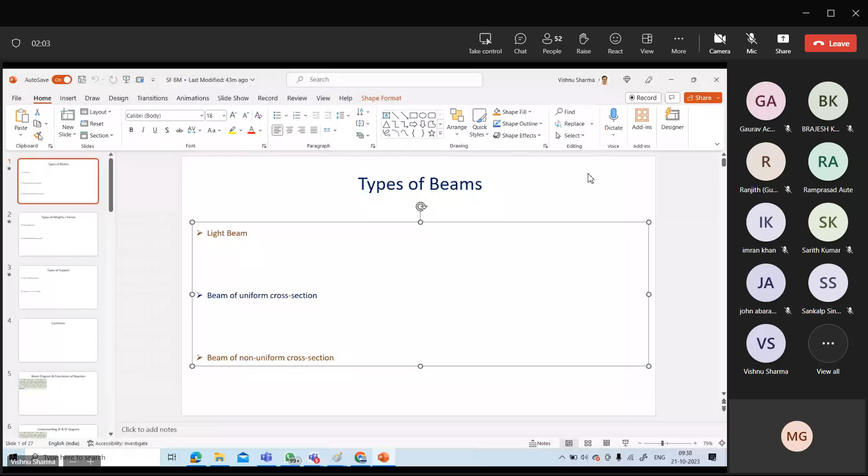Yes sir. Okay guys, the slide is visible right, with types of beam written on it, right? Correct, can you confirm?

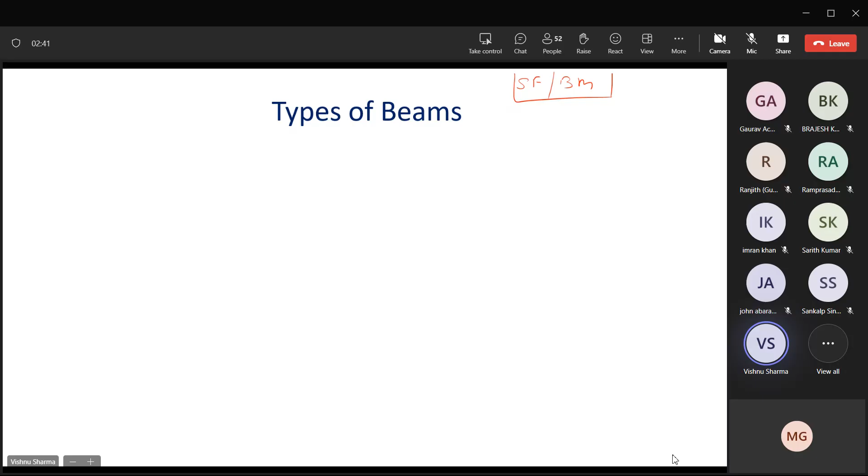Okay, so guys we are now going to introduce the SFBM topic. Before we go to SF or BM as such, we need to be clear about certain terms which we are going to use.

In our questions we may use the word light beam. Light beam means a beam whose own weight is insignificant as far as the question is concerned. That means you will not take into account the weight of the beam. Light beam would mean that whatever other forces are given, you will consider the weight of the beam to be neglected - it will not be given. So you should not start asking what will happen with the weight of the beam, because if the word light beam is used, that means the beam has negligible weight.

When we draw our diagrams, if we draw the beam with a single line, then we should see that as a light beam so that in the diagram we don't have confusion. When I represent a beam with a single line, that shall be construed to be a light beam. Is that clear?

The second type of beam in our question will be a beam of uniform cross section. There will be only two types of beams in our context - there can be multiple variable beams and all those things, but a beam of uniform cross section means the weight of the beam will be significant and has to be included. But what does uniform cross section mean? It means the weight of the beam is uniformly distributed along its length.

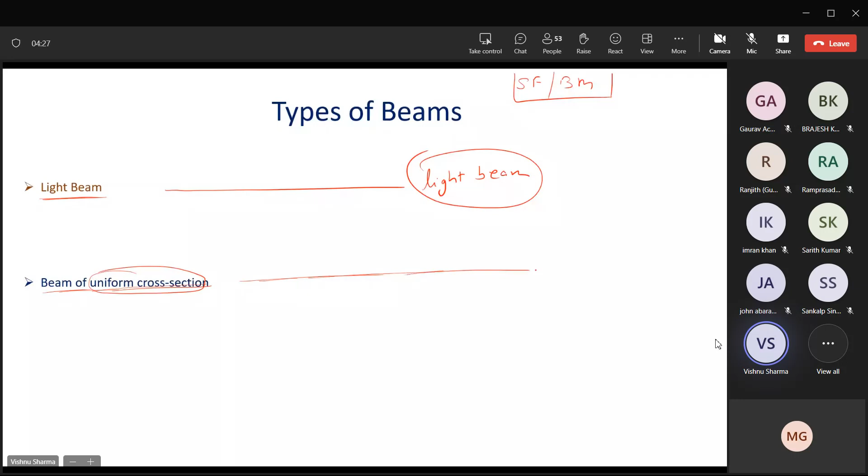And if it's a beam of uniform cross section, we will represent it like this - beam of uniform cross section. Are these two types of beams clear? That means if you say this beam is 10 meters long and it weighs 50 newtons, it means the weight of the beam is 5 newtons per meter - if you take 1 meter of the beam, the weight will be 5 newton. That is what is meant by uniform cross section.

Then there can be beams of non-uniform cross sections - we will not be interested in studying them. The beam may be like this, or you can draw whatever fancy idea you can get. You can make a beam of whatever type that appeals to you, but this is going to be out of our discussion.

So are the two types of beam that we are going to use - light beam and beam of uniform cross section - clear, and how they'll be represented in the diagram? Class clear? Yes sir. Okay, so don't have any confusion about the weight of light beam - it's already accepted that for a light beam, the weight of the beam is negligible.

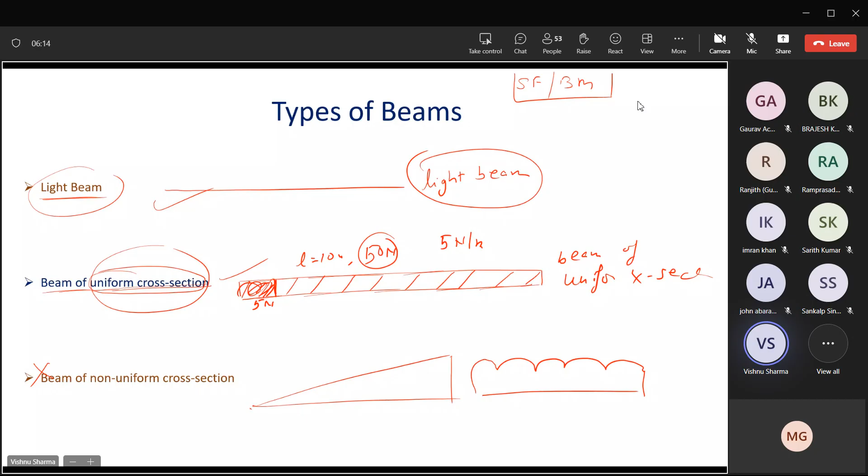Then some weights or forces will be loaded on the beam, whether it is a light beam or a beam of uniform cross section. Now, the types of weights we'll be dealing with include a point weight or a point force, meaning this weight acts at a singular point.

Of course, nothing can literally act at a single point. There cannot be a weight acting at a single point, but for the purpose of our calculations, a point weight or point force shall be deemed to be one which is theoretically acting at a singular point.

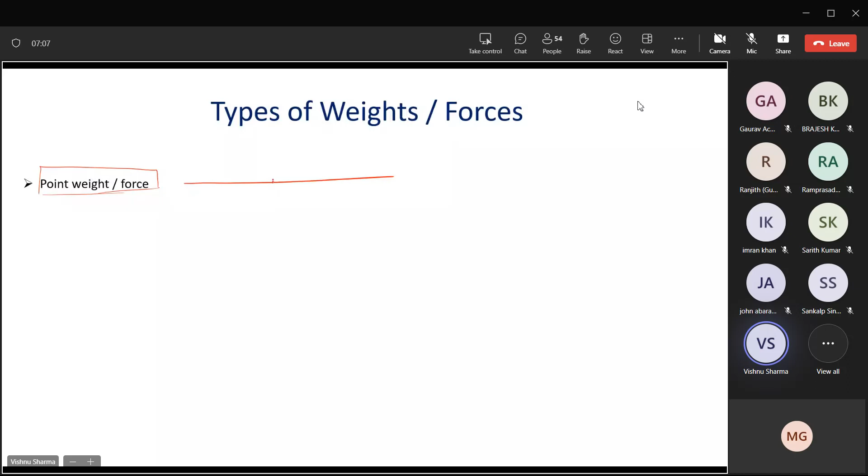So if I have a light beam and at point C I have a point weight, I will represent it like this and put the value. If the point weight is 20 newtons, I'll represent it like this. If the same 20 newtons was acting on a beam of uniform cross section at point C, I'll draw the beam like this, identify wherever point C is, and put the point force of 20 newtons. This is how I will represent point forces.

Is the concept of point force clear, guys? Yes sir. Okay, then we have uniformly distributed load.

In short, in exams this terminology is used sometimes - UDL. UDL stands for uniformly distributed load. It means the load is distributed at the same uniform rate along the entire spread, whatever the length may be.

For example, let's say I have this light beam and this beam of uniform cross section - two beams with me here. Let's say here is A and B. Let us say there is a UDL of 30 newtons.

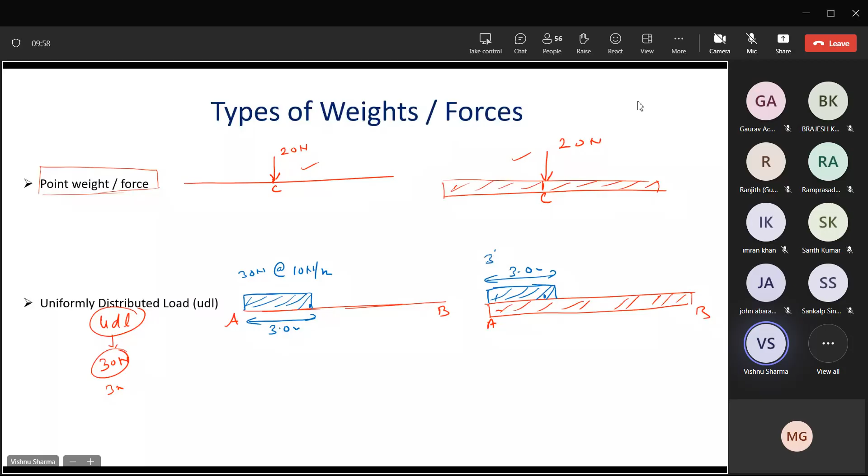So the same thing, if I have to represent it on the beam with uniform cross section, it will be exactly the same. I'll represent this UDL here over a length of 3 meters. So this is 3 meters, and it is 30 newtons at the rate of 10 newtons per meter.

Any questions on these two weights - point weight or point force, and UDL or uniformly distributed load? Guys, any questions on these two types of weights or forces? Let me know.

Sir, you mentioned UDL is distributed only for 3 meters. So this is the question I gave you - we have a UDL of 30 newtons spread over 3 meters from end A. So this is what I have specified in my question now.

Okay beta. But if we didn't have 3 meters distributed all over, then how will it be? Then you'll draw over the full length. If he says full length, you'll draw the full thing over the full length, beta - you'll stretch this. Oh, here, okay.

Any more questions, guys, on how to represent weights and forces in the diagram?

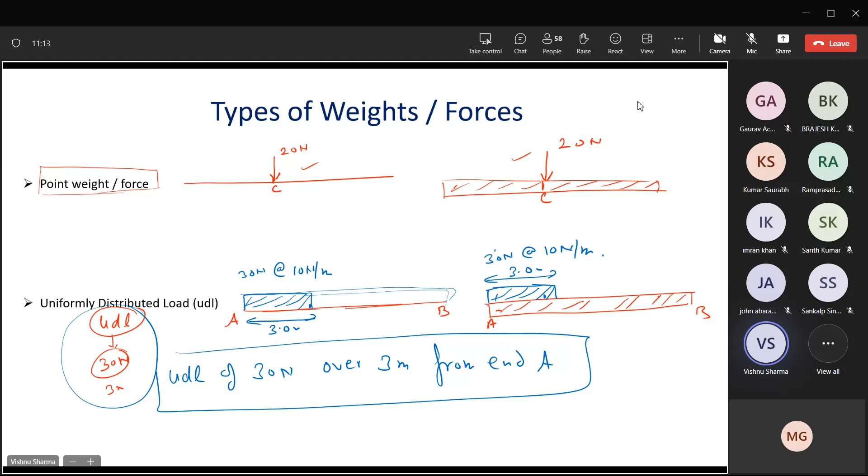Next is the type of support the beam will have, because if you don't support the beam, by gravity it should continue to move towards the center of the earth. If you place your pen on your table, with the pen representing the beam, the pen has come to rest on the table because the table has supported it. Your table top would have continued going towards the center of the earth if the four legs of the table were not supporting it.

Whereas the tabletop is not fully supported on the floor - it is supported by maybe three or four legs - the pen, when you keep it on your table, is supported along the entire length. So how is the beam supported?

Again, there can be point supports. They are also called knife edge supports because a knife edge is like a point. So if you have a light beam or a beam of uniform cross section, where the supports are will change from situation to situation. Let us say we have 2 point supports, one at end A and another 2 meters from end B.

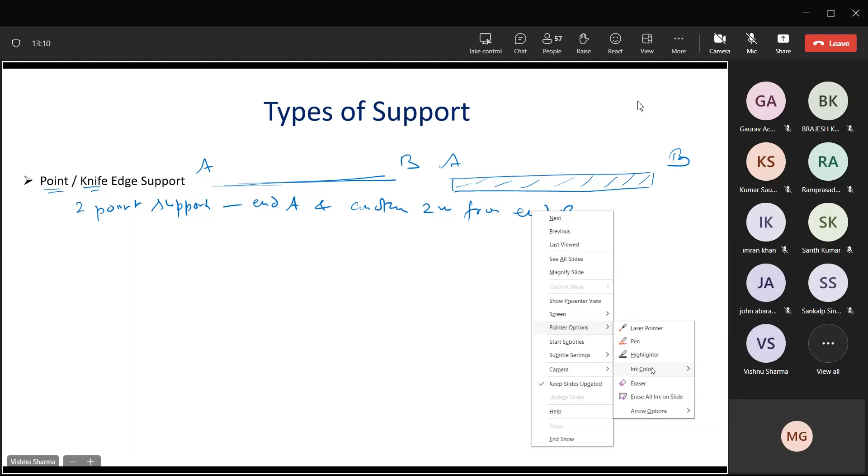What does it mean? It means a point support will be like a point weight, but the only difference is it will be acting from downwards. It will be supporting from down. So basically, you see.

One support is at end A. I will put the support like this, a knife edge support. Another support is 2 meters from end B, so I'll put it somewhere here. The same thing, if I have to put on the uniform beam of uniform cross section, I will put one at end A and another 2 meters inside of end B.

This is how the point or knife supports will be represented in our diagrams. What does it mean? Practically, or theoretically rather, these supports are acting at a singular point, like the point force from top, they will exert a point reaction from bottom upwards.

Then we can have support over a certain length or the entire length. I gave you the example of your pen. If you put your pen on your table, the entire pen is supported by the table, that means it's supported over the entire length.

Or sometimes you take a plank to cover a gap, suppose there is a trench you want to pass over, and you put a plank on the trench. Some part of the plank overlaps the ground on one side, other part overlaps on the other side, and the middle part is not supported. So support can be at a point, over a certain length, or over the total length.

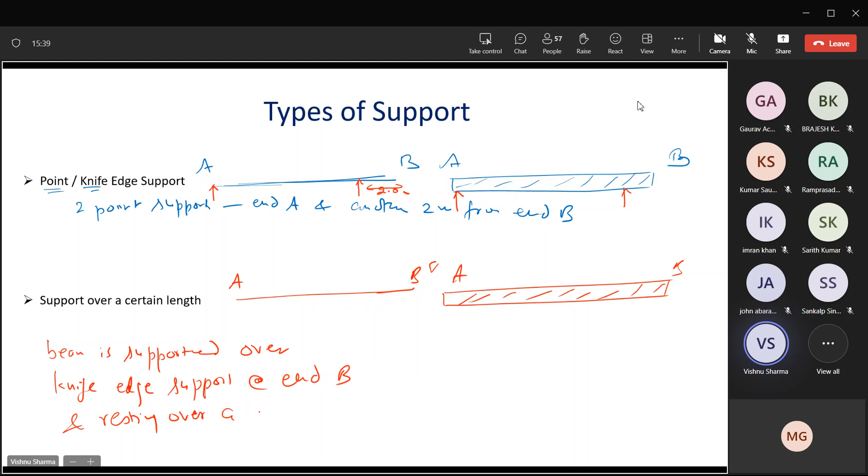knife edge support at end B, and resting over a plane surface over 3 meters from end A. Okay, over 3 meters from end A.

What does it mean? That means at end B, I have a knife edge support. At end A, I have some part of it resting. So in this case, the knife as support would be like this. Here, the knife as support would be like this. Then resting over 3 meters, that means now it is resting over a support for 3 meters of length.

Here it will be something like this. If it was full, you will stretch this to the full length. I don't think that needs any explanation. You can just stretch it to full length, like the pen, if it is resting over the full thing, it can just be stretched.

You can have both the sides resting on some length. You can have knife edge on one side, resting on the other side, and those will keep changing the combination of the question. Guys, any doubts on the types of supports that we are going to deal with?

Whatever I have said until now, is that all clear, beta? Last, can you confirm if it's okay up to this point? Yes, sir. Yes, sir. Yes, sir.

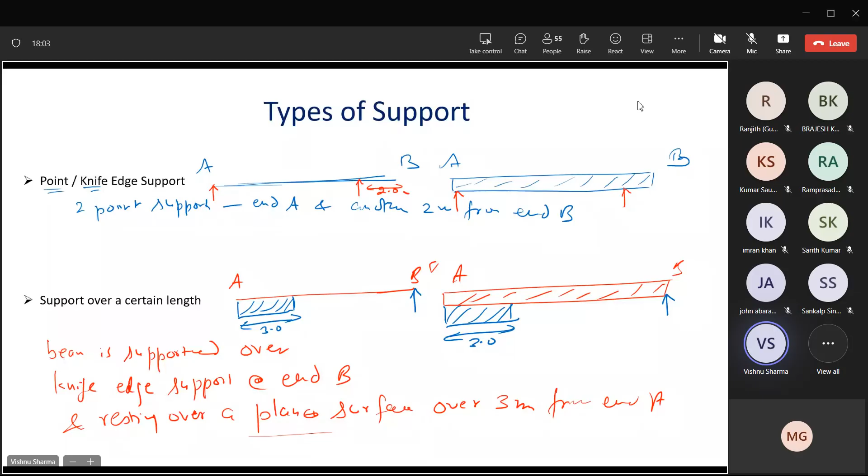And whatever I have described here will help you in making a suitable diagram, so you should not be struggling with this. This I'll come to you. Cantilever, you can leave it, I'll explain later, don't worry.

Now here is a question, and through the question I'll keep explaining. Can you make a beam diagram for this question on display, guys, based on what I've just told you? Just make a diagram of this beam in question, you can read the question on the screen. Then you can compare at least the first part of the diagram. The first step of everything will be the diagram, so if you are comfortable with making the diagram, the first step is well taken.

Okay, if you have made it, then: the light beam AB is supported, knife supported at its ends. The beam carries a load 50 newtons and 2 meters from end. I will make the diagram, and if your diagram matches this, fantastic. If it's not matching, please let me know why there was a confusion, because there should not have been any confusion.

At its mid length, I can call it as C. There is a 50 Newton downward force. And at another point somewhere here, let's say if I call it as D, there is a 30 Newton downward force. And this distance is obviously 2 meters.

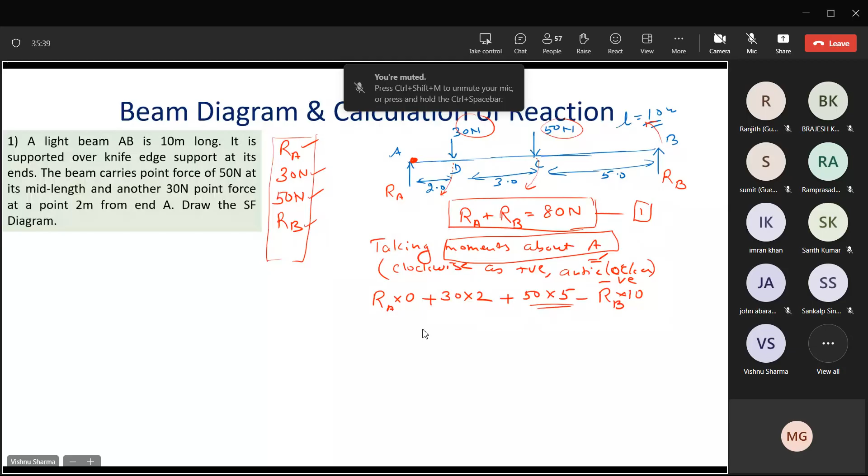Correct, yes sir, beta? Okay, so now it's clear?

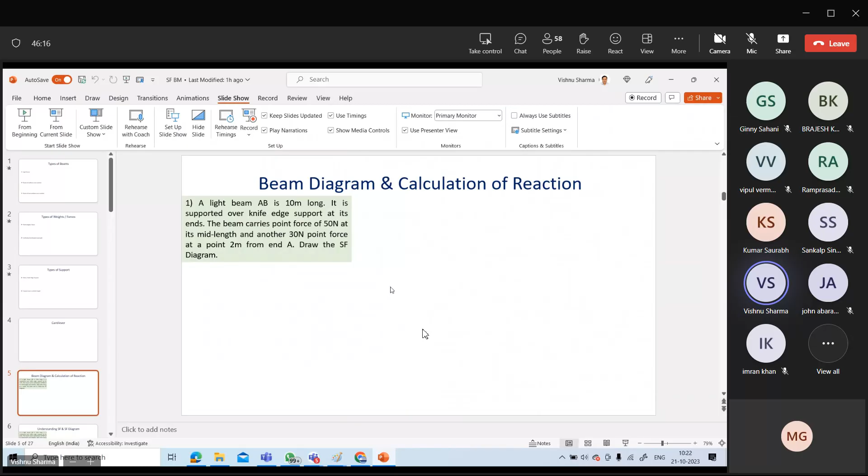Now I'll clear this again and I'll make the diagram again and I'll speak the things again as I'm doing, and then you can probably follow, because that will be the first step of every question, even before shear force and bending moment come into calculations.

First thing we'll do is we'll make the beam diagram. A, B. Question says it has knife supports at both the ends, so knife edge supports. Length of the beam is 10 meters. The beam is light, so it is represented by a single line.

The beam carries a point force of 50 newtons at the mid length, so 50 newtons. I name this point as C. It says another point force at 2 meters distance from end A, 30 newtons. I can call this point as D. Now this is where the beam has been made, the diagram has been made.

Okay, now next we write, let us say the reaction at A is RA and reaction at B is RB. So we write the reactions at the supports. Then we say RA plus RB is equal to 80 newtons.

For reasons I've already explained, the total downward force must be supported by the total reaction. Now we have to find out individual values of RA and RB.

So we take moments about any one support. You can take it about A, you can take it about B in this case. You can take about any third point also, but that will unnecessarily invite difficulty to the question. I took A in the last working, let me take moments about B this time, just for the sake of clarity.

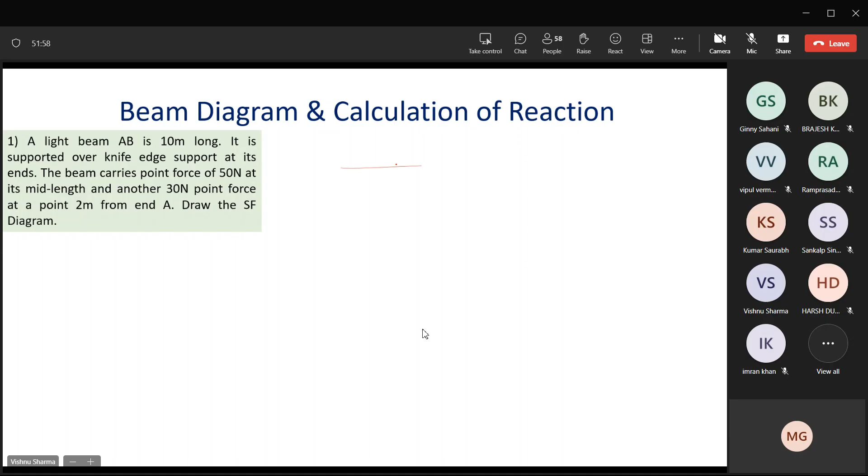A, B, point support. RB you got as 31 newtons, RA you got 49 newtons. At C, you have 50 newtons. Here you have 30 newtons. This was our diagram, okay guys.

Now guys, 30 newtons and 50 newton are acting downwards, and these reaction forces are acting upwards. That I don't think is an issue.

Okay, now let's take any two points along the length. Tell me, where do you want to take? Between AD, DC, CB? Where do you want to take the first point? AD, okay, let me take this point here, X.

Tell me one more point where you would like to take it. CD? CB or CD? What did you say? Charlie Bravo, sir. Charlie Bravo. Okay, anywhere you can take.

Distance is immaterial for this. When we come to bending moment, then the distance will also become important. In this question, it doesn't make a difference. So, now you see guys,

these points you've chosen randomly out of your choice. What I want you to do is take the stock, or do the audit of forces, resultant force on either side of this point - that means on this side and on this side of the point.

So now, how is this upward downward anomaly addressed? Let me change the color to... which color can I use? Yellow, orange maybe. This upward downward thing is addressed by introducing a sign convention.

What is the sign convention adopted then? They say if you are doing the algebraic sum of the forces from left to right, that means from the left end to X, this is called left to right. When you go from left to right, we'll not call the forces up or down — we'll take upward forces as positive

and downward forces as negative. Okay, and what have they done? If you go from right to left, that means this way you come to X, this is called right to left. Let me write it: right to left.

When you go from right to left, the sign convention is reversed so that everybody gets the same answer. You don't have to remember both, you can just reverse it — upward will become negative and downward will become positive.

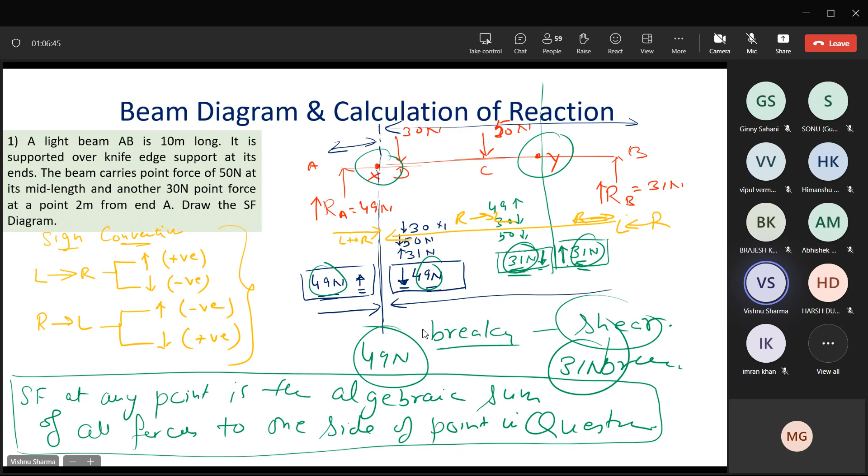This is the sign convention introduced: one, to remove the use of the words up or down; two, to remove this anomaly of sign, because you have reversed the sign convention. Now everybody will either get plus or everybody will get minus — you will not get two different answers, one from left to right and other from right to left. So you have reversed the sign convention so that the results get harmonized, because the value in any case was the same. Correct, Peter?

Understood, Peter? Left to right, right to left concept. Is that clear? Yes, sir.

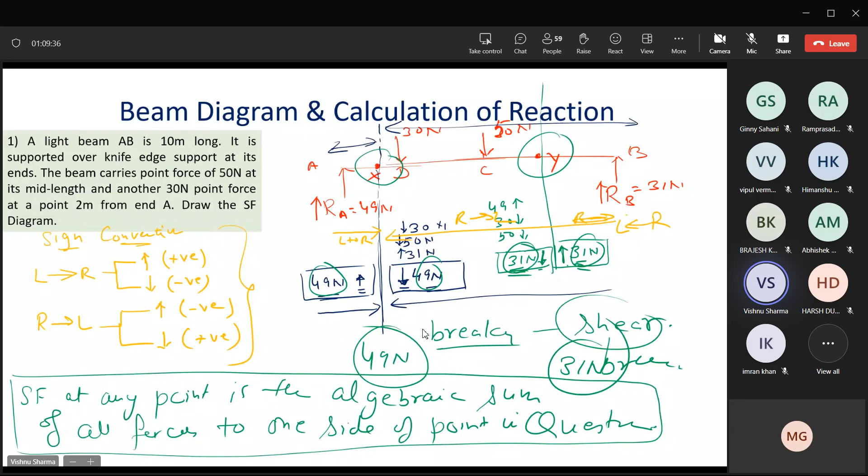Don't get panicky, I'll clear it again. Let me see if the next slide is for this only. Yeah, it's the same thing. Okay, let me redraw the diagram here.

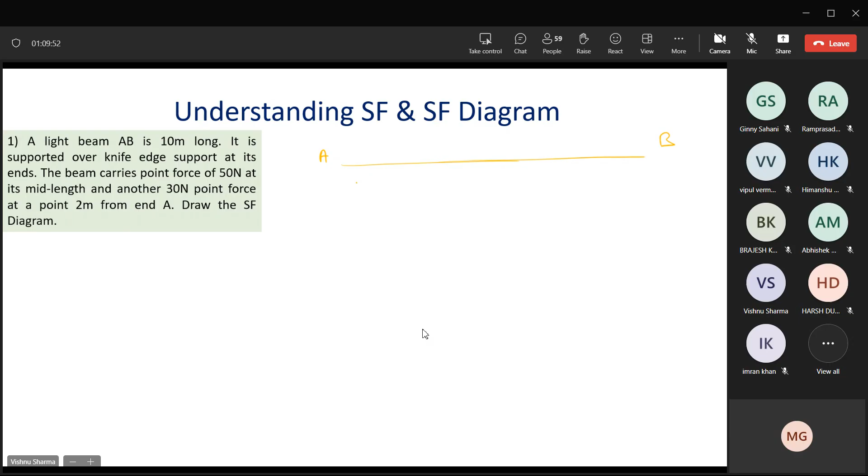Guys, now I will select some points here. I'll select some points here, and in a very crude way - don't take down what I'm telling you now, that's only for the purpose of explanation. Then I'll tell you a shortcut way of getting the diagram, okay? So that you don't get stuck.

I'll mark certain points and you will help me in calculating the shearing force at those points. We'll go from left to right all the time. So when we go from left to right, guys, upward will be positive, downward will be negative, right? So use the sign convention plus minus, don't say up and down now.

I take point 1 just to the left of A. Just to the left of A means I've just taken it at a point which is just before A. That means you have point 1 and the next point is point A. So for practical purposes, A and 1 are the same, but they are just points adjacent to each other.

Okay, so if you cover this, the right side, at point 1, what will be the value of the shearing force? Are there any forces to the left of 1? Yes or no? No, sir, zero. Does everybody agree shearing force at 1 is 0? If anybody has any doubts, please don't wait for me to finish, you can interject anytime.

Guys, now move your paper to point 2. To the left of point 2, is there any force? Yes, sir, 49. Tell me with sign convention. Plus 49. So shearing force at point 2 is plus 49. Do you agree, guys, anybody? Those who are taking time can take their time. Once you are satisfied, please confirm.

Okay, reach point 3 and see what are the forces to the left of 3, the resultant of forces to the left of 3. Plus 49, plus 49.

Please take your sheet up to 4. And 4 is a point just to the left of D. Plus 49, plus 49.

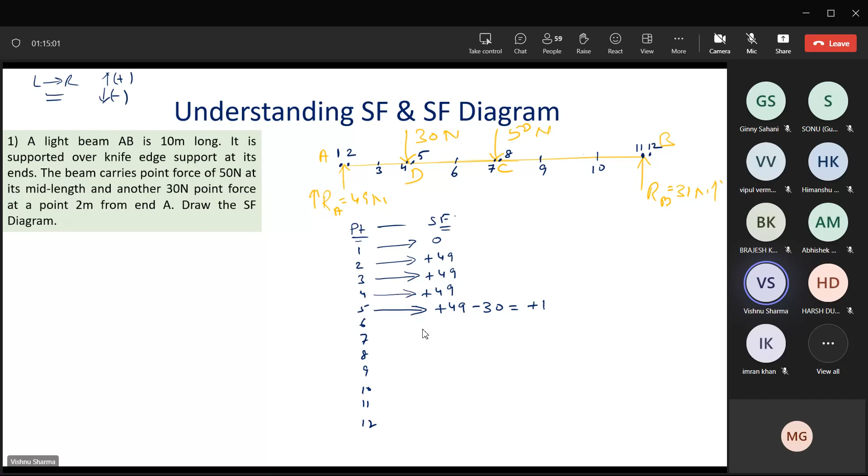What will be the shearing force at point 5 now then? Plus 49 minus 30, which becomes plus 19. Does everybody agree with this? Yes or no? If you don't agree, let me know. You're right, beta, but let people confirm if they've understood.

Class, anybody has any doubts about shearing force at point 5? No, sir. What will be the shearing force at point 6? Is there any change from 5 to 6? No. So that means it will remain plus 19, correct? Am I right, guys? At point 6, it will be plus 19, yes or no?

How much would it be at 7? Speak now, I think you speak, then that is better. At least I know you're getting it. Plus 19. Yes sir, same. Same, how much? Plus, say plus 19, don't say same.

What would be at point 8? Minus 31. Okay, that is plus 19 minus 50, minus 31. At 9, I'm sure minus 31. At 10, minus 31. At 11, minus 31. At 12, how much would it be? Zero, sir. Minus 31 plus 31 becoming 0.

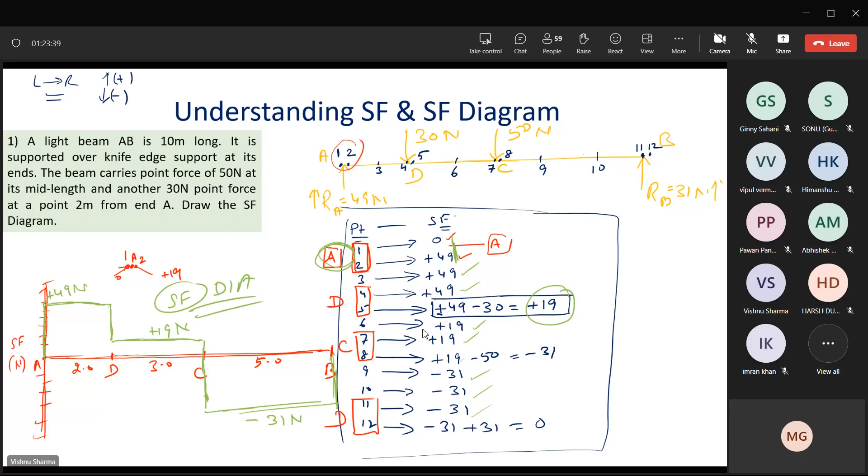Now I'll make the shearing force diagram for this question from beginning until what I have done till now. And then I'll summarize the points that you need to keep in mind up to the shearing force.

First is we'll read the question carefully. It's very, very important. Second, make the beam diagram, make correct beam diagram.

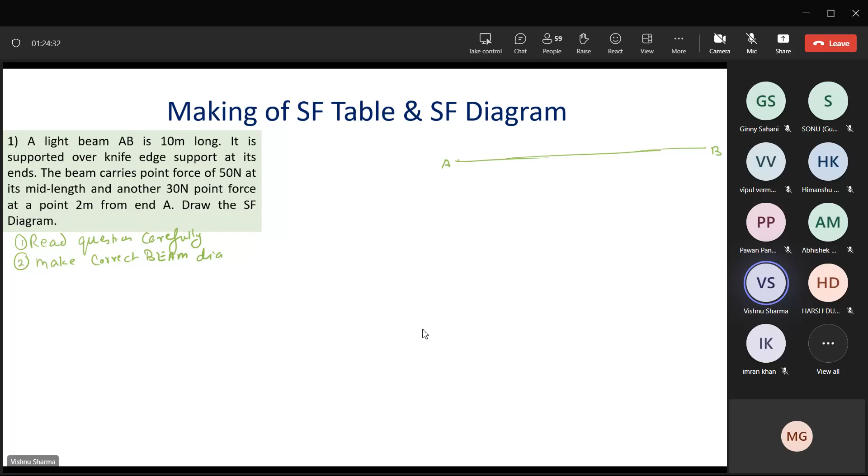Now, I have read it carefully. Now I'm making the beam diagram, right? This is the beam AB, supported at the knife edge support at its two ends, carrying at mid length 50 newtons and 2 meters from end A, 30 newtons.

I can call this point as C and this point as D. This will lead to a reaction of RA of 49 newtons at A. We have already calculated, or let me calculate RA and RB.

Okay, let me do the full question. This is 2 meters, this is 3 meters, this is 5 meters. Okay. So we have learned how to make the beam.

Guys, first 2 points clear to everybody. Now you will tell me which point you are having the problem so that that particular point is emphasized upon rather than repeating everything all over. Third, From point A, RA, sir.

From A. RA is the force at A, not from A. RA is A. RA is the force acting at A. That is the reaction at A. Okay.

Third is calculate the reactions. Now I'll execute the third step here.

Taking moments about A. I'm writing everything. Sometimes I may just start the word and scribble, but I'm speaking everything also. Taking moments about A, clockwise as negative. Sorry, my mistake. Sorry, guys. Clockwise as positive,

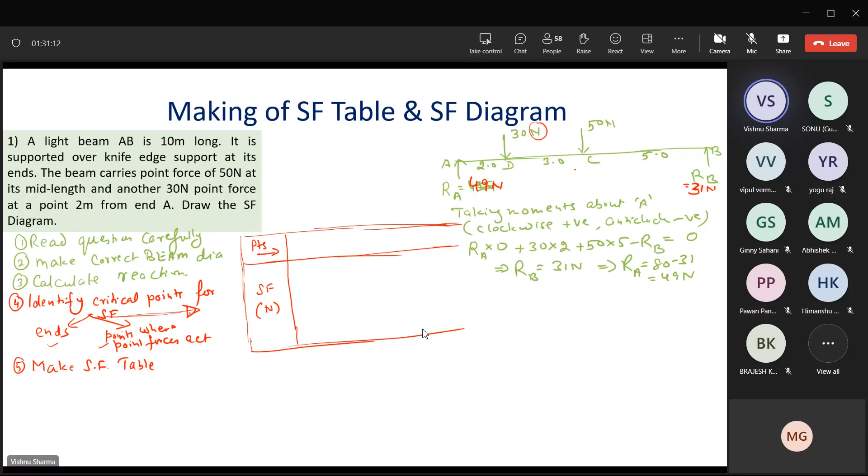Now I make as many columns as the points I have taken. I have to make this table for 4 points: A, D, C, B. Put these points, do not change the order, do not jumble up the order of the points. Since I'll be going from left to right, the points will be strictly in the same order as they figure in the diagram, beta. They have to be as they are on the diagram.

Is this point understood, beta? Yes, sir. So if my diagram is A, D, C, B, and in the table you make it A, C, D, B, you have goofed it up, messed it up nicely. So don't expect anything out thereafter.

Now, certain cells you have to divide into 2. When I say cells, I mean these spaces between A, D, C, B. So in making the shearing force table, please pay attention: wherever you have the point forces—I'm not saying point load, I said point forces, whether upward or downward—at all those points, the cells need to be divided into 2.

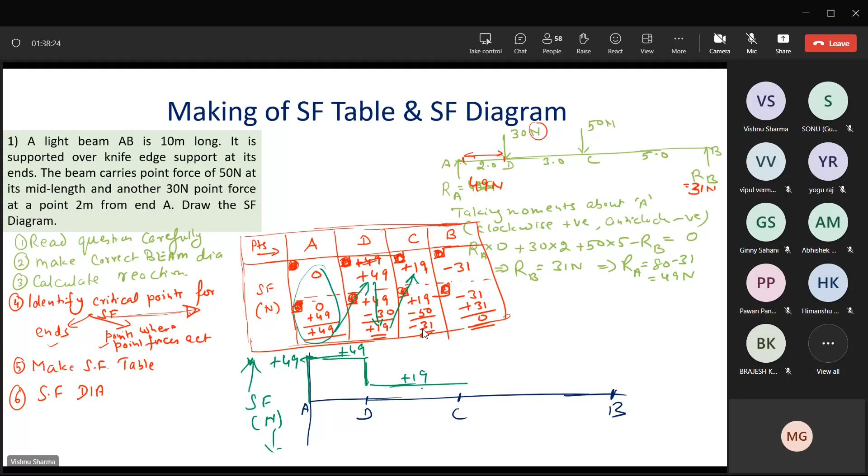Then from here to D, it remains plus 49, you see. And then at D, it changes to plus 19. I'm marking only for the purpose, plus 19, only for the purpose of explanation. Then from D, it remains plus 19 up to C. Then it becomes minus 31 at C. Then it remains minus 31 up to B.

And becomes 0 at B. And this is how I have drawn the diagram. I put the arrows in the table, and I think if you correlate the arrows with the drawing I've done, you'll realize that it's very simple to draw from the table. Yes or no?

Sir, in the table do we have to present the values like this, I mean 0 plus 49? This is the simplest and the best shortcut that can be taken. You cannot take more than that. If you try to do anything more, you will have to do much more than what is being done here. Okay, so it's up to you. This is the bare minimum, and this can see you through in quickest of time.

My question is, do we have to write like 0 plus 49, or can we just write the final value of plus 49? That's good enough, no, 0 plus 49, you have to carry forward. There it was only 0, na beta. You carry forward, then see, it is easier for you also. In any case, you're considering it, so what is the harm in writing?

Okay, sir. In fact, many a times I will write in the top one also, I'll say 0 plus 49, plus 0 plus 49. You can write that also. Always write the carried forward value and the change. If you write it, it will make things so much easier for you also, better for revision and everything.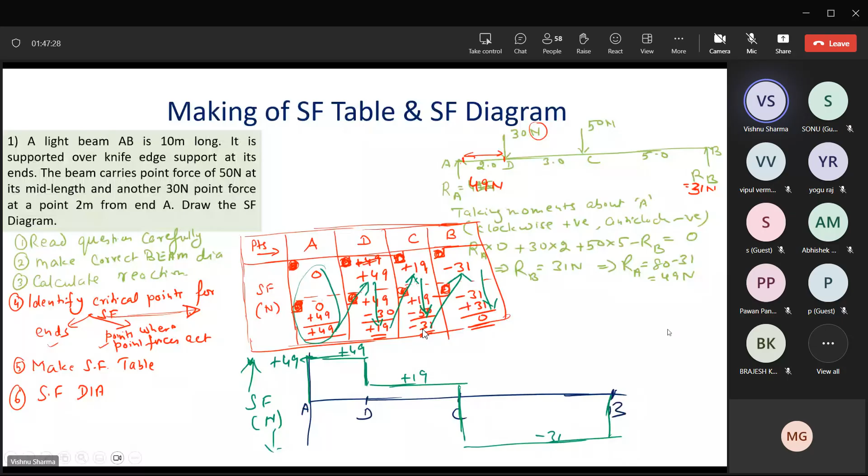So let's see some other questions. So whatever I have said, now is the time for you to participate. Now is the time for you to participate. So recap of steps leading to SF diagram, guys. I've already recapped those points. What is that?

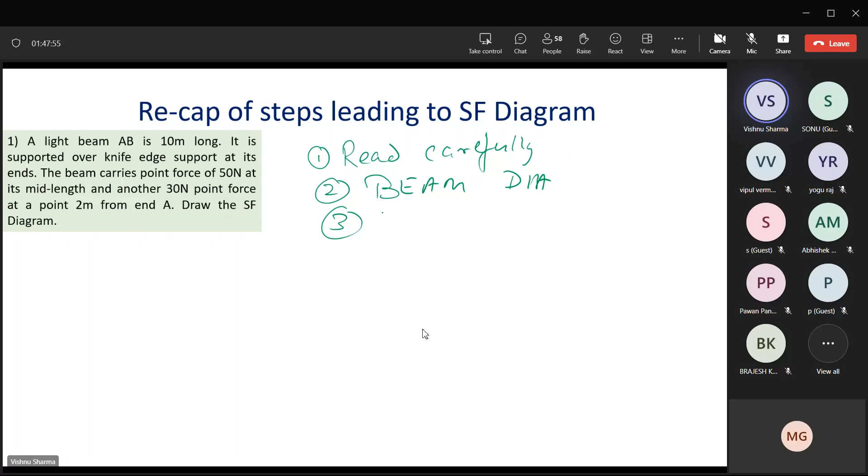Read the question carefully. Then correctly draw the beam diagram. Get the reactions. Then identify points for SF, make the SF table, and sixth is the SF diagram. This is what we mean by having a recap of steps that lead to the SF diagram. It all starts with the correct beam diagram, because if your beam diagram is wrong, you will not be able to shape your SF as we go forward.

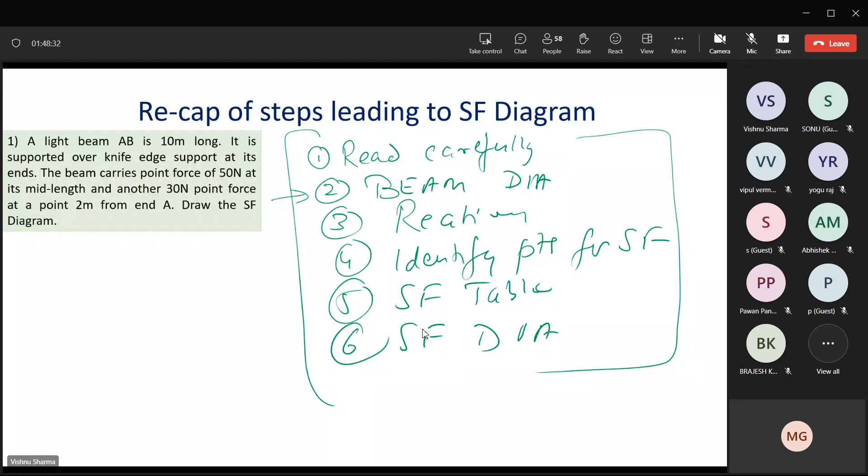Okay, now please participate as much as you can and let me know wherever you're feeling doubt. A beam AB, 10 meters long, is of uniform cross section. The weight of the beam is 50 newtons and is supported over knife edge supports at its ends. Draw the SF diagram, only limited to SF.

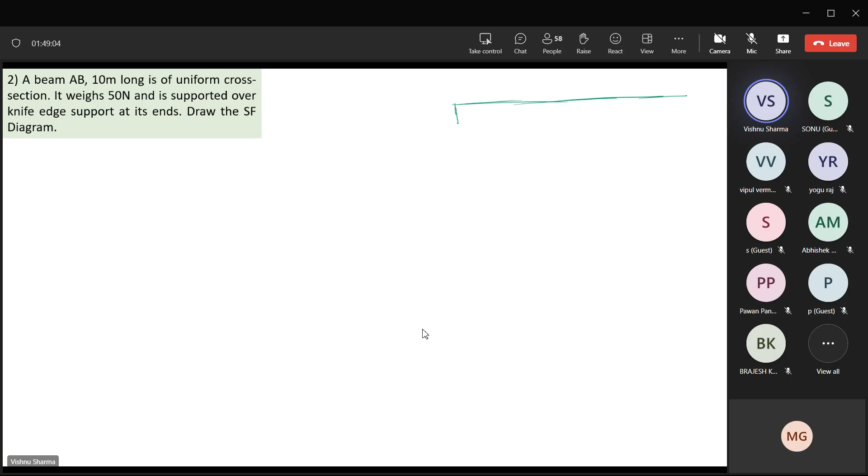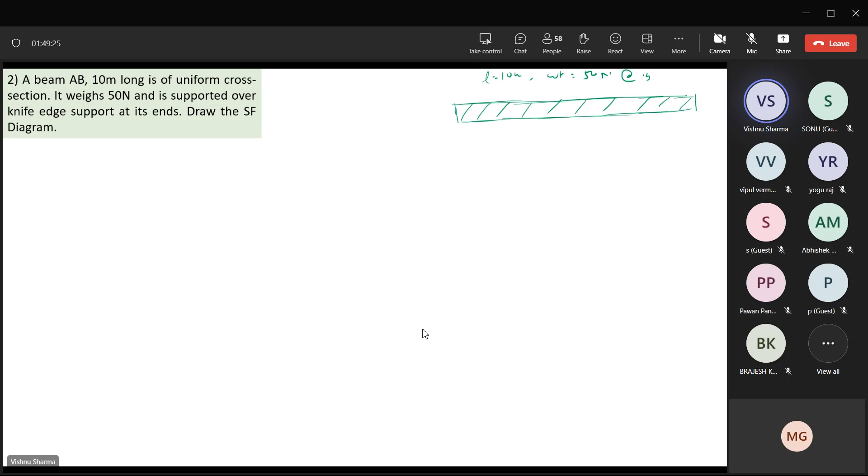Based on our earlier discussion, if any one of you does not agree with what I am drawing, please let me know your concern, don't live with your concern. This is how we represent a beam with uniform cross section. Length of this beam is 10 meters, its weight is 50 newtons, and obviously this 50 newtons is distributed as 5 newtons per meter. It is supported at the knife edge supports at A and B.

Guys, is the diagram correct? Yes or no? Please read the question and tell me, do you agree with the diagram or you need any clarification? Okay, the diagram sir, diagram is okay.

Now there will be reaction RA at end A, there will be reaction at RB. I'm sure guys, please speak up, what will be the total reaction? 50 newtons. Very good, 50 newtons. Okay now guys.

I'll just take you back to the ship. Your ship's displacement comprises of many weights, W1, W2, W3, maybe like this, numerous weights. These some are placed in the forward direction, some are placed midship, some are aft, some are to the port, some are to the starboard, some are down, some are up. They are distributed all over the three-dimensional body of the ship. But if I tell you that MV Hinge ship weighs 10,000 tons, displaces 10,000 tons, and has a KG of 7.5 meters.

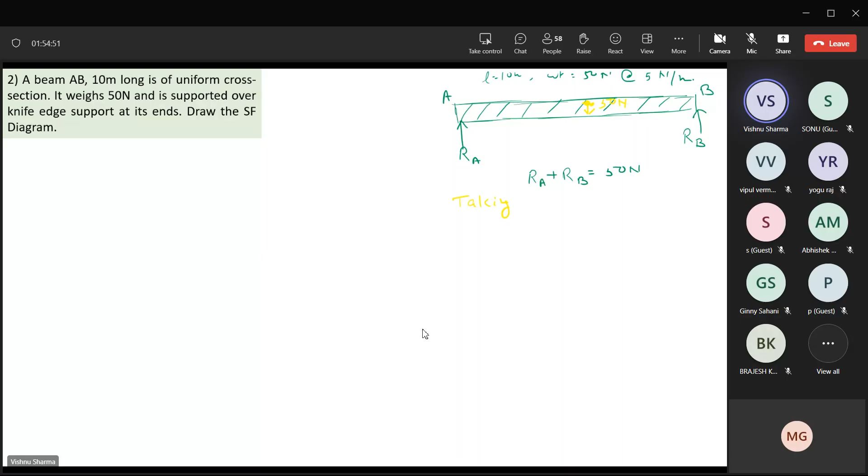So now, taking moments about - should I change to a dark color, or is it okay, guys? It's a little light, sir, please change to a dark one. Okay, no, it doesn't cost me here, it's okay.

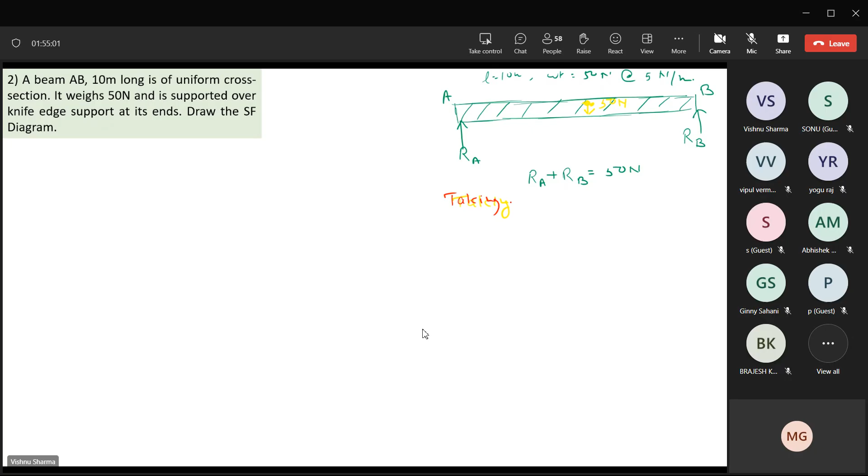Now, taking moments about A, clockwise as positive you can write, anti-clockwise as negative. I'm sure you'll agree it is RA into 0. Now, this weight acting through this point, for one body assumed, will be clockwise. So plus 50 into 5, because the length of the beam is 10 meters, minus RB into 10, equal to 0. This will give you RB as 25 newtons.

I could have done it without calculation also, but then unnecessarily people would have got confused, so I said let me calculate and show it to you. If RB is 25 newtons, then RA will be equal to 50 minus 25, equal to 25 newtons. Both RA and RB are equal, both are 25 newtons each. Is that clear with everybody, guys?

Any questions on RA, RB being calculated? Sir, RB is acting upward, so it is like anti-clockwise, na sir? Okay, minus RB. Yes, minus, correct sir. Okay guys, done. So everybody agrees up to this place.

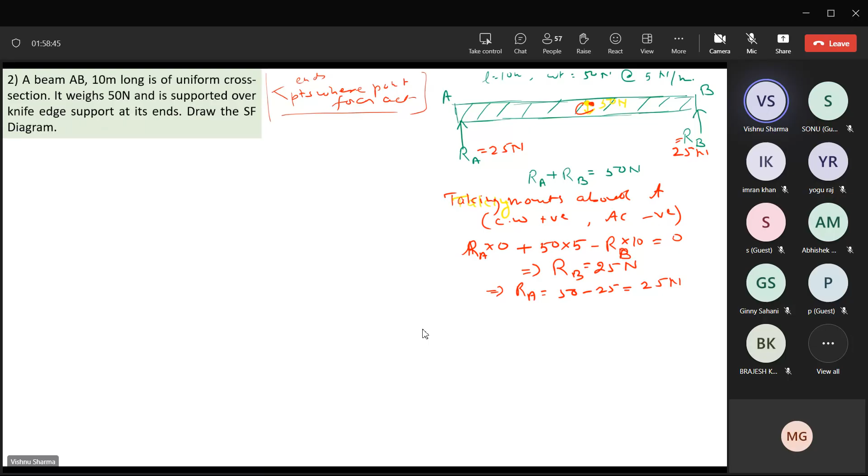As a student, I am having a doubt, should I take 3? I have taken the third one. So the doubt has come from my side, and you were absolutely right when you said only 2. Now please, when I ask you questions, please respond, because the more you respond, the more you will get to know where the gaps lie between what I have said and what you have understood.

A, C, B - these are the points shearing force in newtons. Guys, look at the diagram. Do I have to divide all the 3 into 2? Do I have to divide 1, or do I not have to divide any? 3, 2, or 1, or none?

How many need to be divided into 2? No sir, we didn't divide. Which ones? Which 2? A and B. Why? Because A and B have point forces RA and RB. Is that clear, beta? Yes.

Now again, imagine you have covered the sheet up to A. What will be the shearing force here where my marker is roaming? Zero, sir, zero. I carry forward zero.

What is the change taking place from left of A to right of A? 25 newtons, plus. Plus 25, so it becomes plus 25. Now be careful a little bit, I'm warning you so that you don't make mistakes and you feel good in answering.

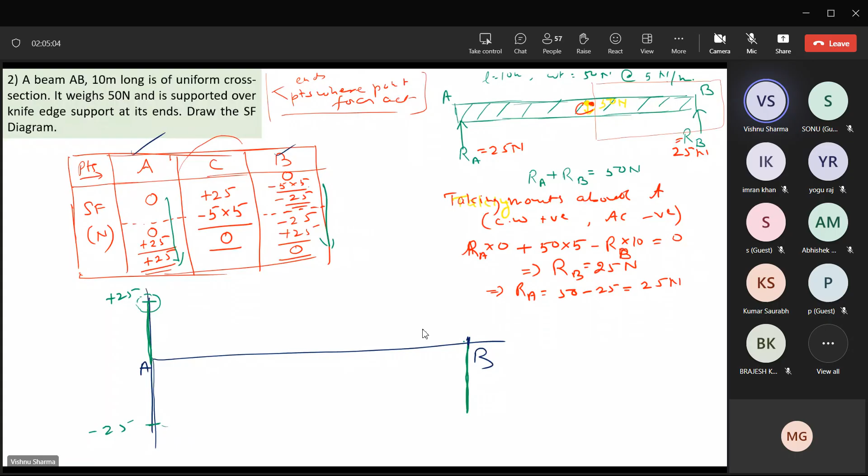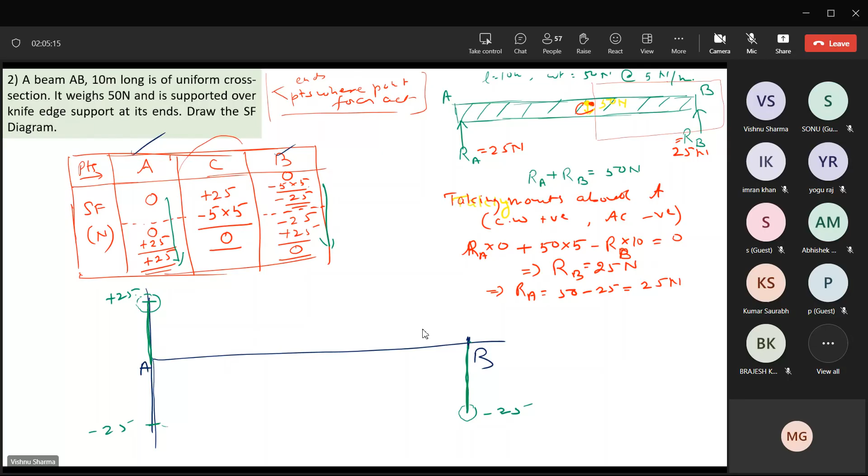This is minus 25. Now I have to join this plus 25 with minus 25. Now they can be joined in infinite ways: straight line, curves, different curves. Do I join them with a straight line? Do I join them with a curve? If with a curve, what sort of curve? The answer lies in the beam diagram.

Guys, when I go, disregard C here now. When I go from A to B and divide this beam into 1 meter sections, is the change in force taking place at a uniform rate? Yes or no? From plus 25 to minus 25, is it changing at a uniform rate? Yes, sir. When the change is uniform and you draw the graph of anything which is changing uniformly, its graph is always a slanting straight line.

Here it is uniform. It is changing at 5 newtons per meter because of the weight of the beam. Therefore, its graph will be a straight slanting line. That means I'll pick up my scale, put it on these 2 points, and just join them with a straight line. This will be my shearing force diagram. The green one is the shearing force diagram for the question. And what do you see? Where is it cutting the x-axis? At the mid length, yes or no?

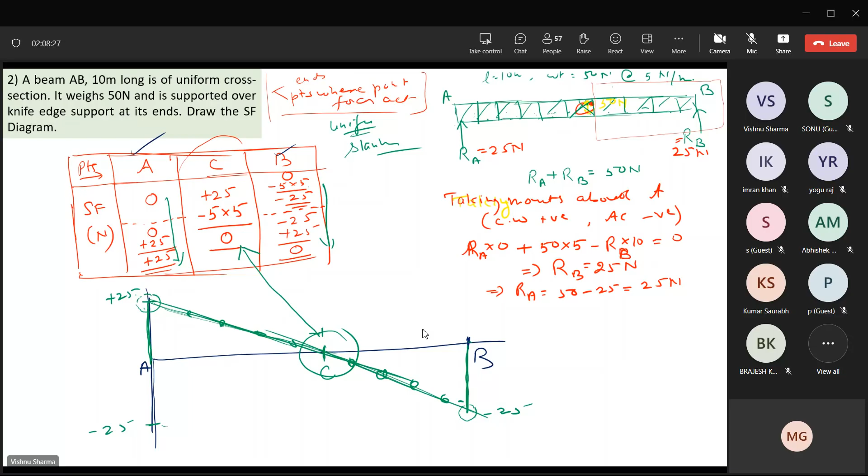Okay. We take one more, in which I have created... this is only for practice purposes. I've created everything, mixed up everything, and please participate.

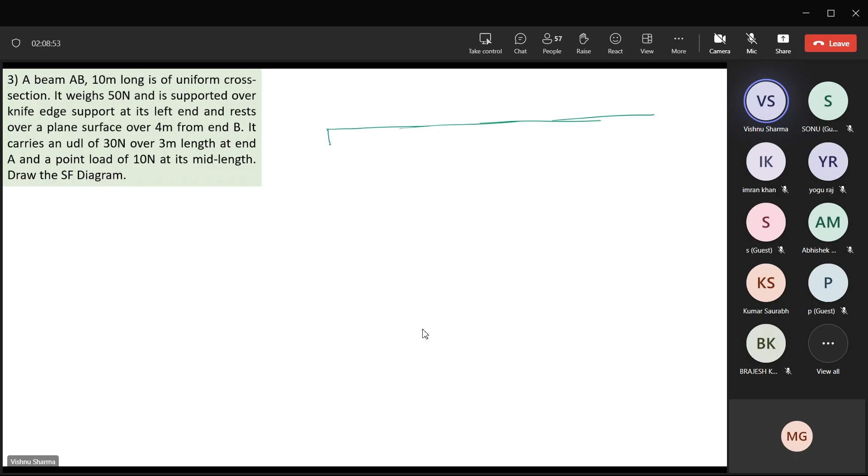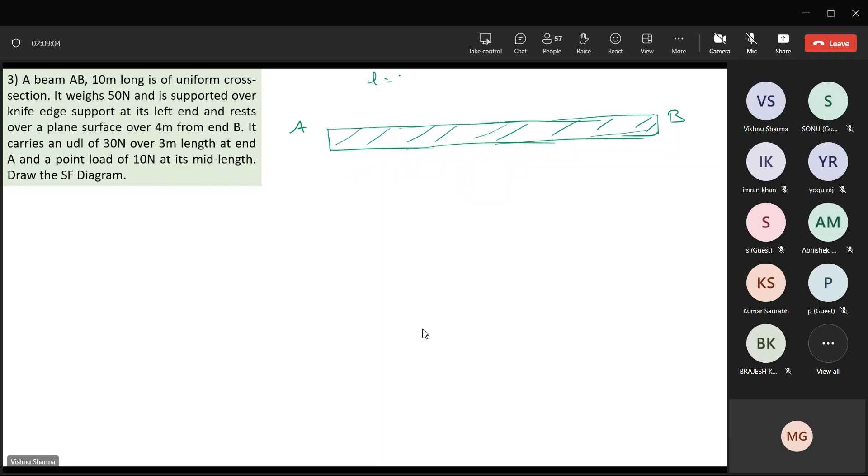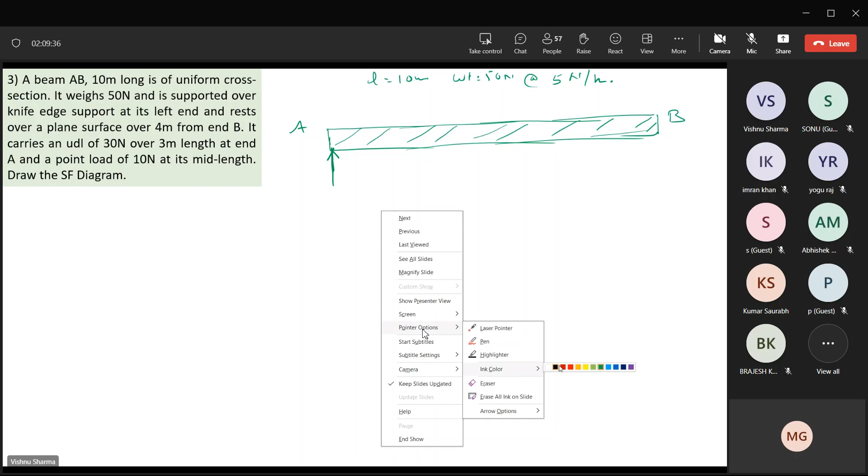A beam AB 10 meters long is of uniform cross section. So the beam is of uniform cross section. As I'm reading, I am also making the diagram. So this is the beam, AB 10 meters long. It weighs 50 newtons at the rate of 5 newtons per meter, right? It is supported over a knife edge support at its left end, like this. And rests over a plane surface over 4 meters of length from end B.

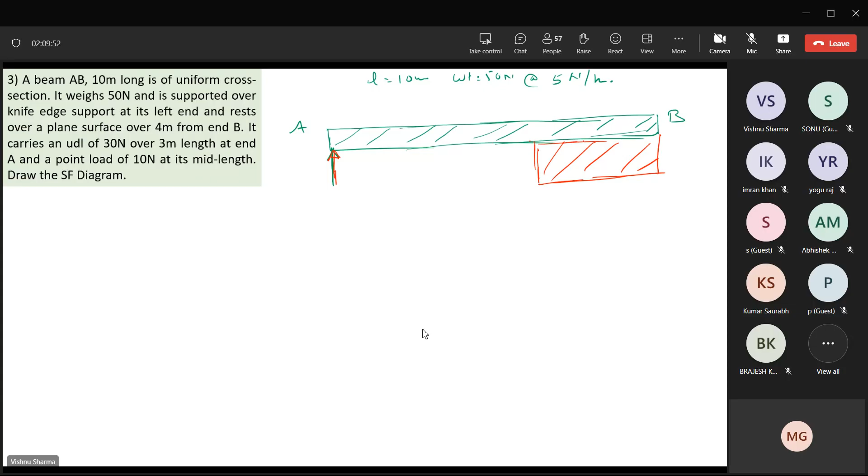So this is 5 meters, with 4 somewhere here. It is resting on a plane surface at end B. This distance is 4 meters. It carries a UDL of 30 newtons over 3 meters length at end A. So this is 5, somewhere here will be 3.

There is a UDL here of 30 newtons at the rate of 10 newtons per meter, because it is over a length of 3 meters, right? It also carries a point load of 10 newtons at its mid length.

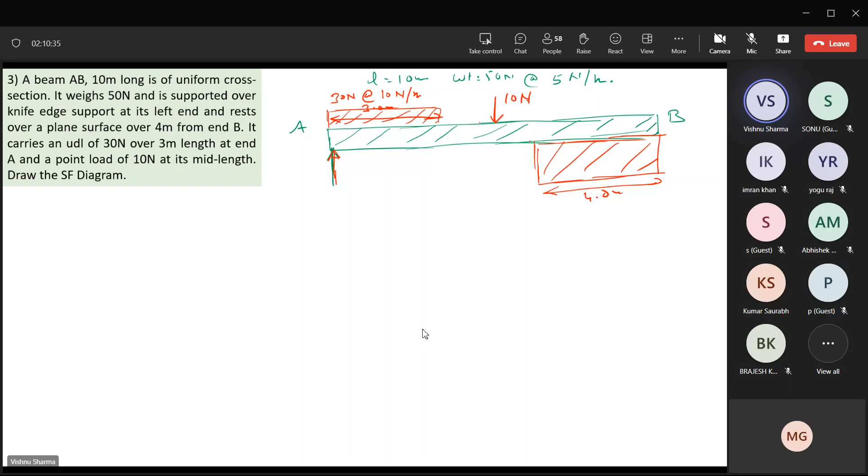Draw the shearing force diagram. Now, before we start talking of the diagram, please read the question. See if you agree with the beam diagram first. It's very important that the beam diagram is correctly made before you proceed with the question, because otherwise, if the beam diagram is wrong, your output is definitely going to be wrong. You cannot be right in any manner whatsoever.

Anybody has any questions to ask on the support? I put in a point support. I put in a plane support. I put in a UDL. I put in a point load. I've taken the beam of uniform cross section. So practically, other than the light beam, everything else that we have discussed until now is included in this particular question.

Is this clear? Anybody has any questions, guys? Please speak up.

Okay, anybody who wants to tell me what should I do for the purpose of calculating the moments? For the purpose of moments, the objects or the weights have to be considered as one unit, like the ship, as we did in the previous question.

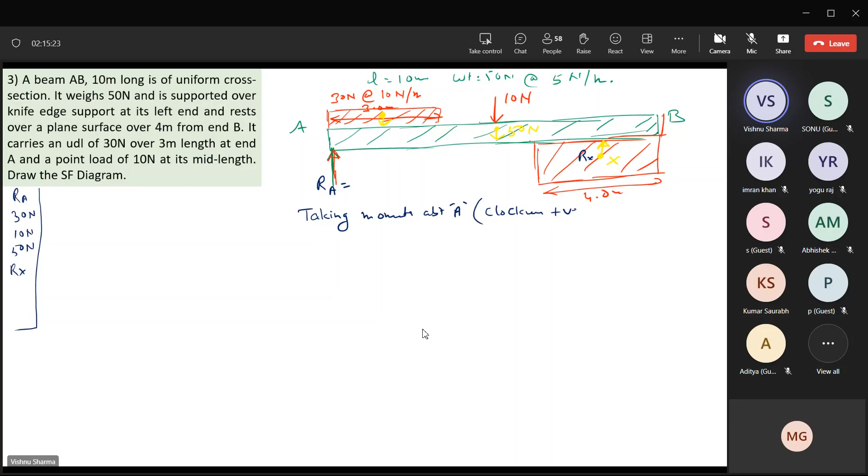Now, taking moments about A, clockwise positive, anti-clockwise negative. This time I'll take RA into 0 as minus 2. Okay, happy now? Okay, so yes, RA moment taken. Then 30 Newton, guys, tell me plus minus, and what is it? 30 into what? Plus minus what? Plus, UDL, 30 times 1.5.

Yeah, but plus minus? Sorry, I missed it, plus, out if you said plus. Plus, 30 into 1.5, very good. Fine. Then is it 10 newtons plus 10 into how much? 5, 5. 50 newtons plus 50 into 5, 5. Minus Rx into how much? 10. 8, 34. 8, 7.

6, 7. Where can the entire reaction on the right side be acting? Assume it to be acting through its center.

Yes or no? Into 6 into 8. Into 8. That's why I marked with the yellow marker. You mark with the pencil so that you don't make mistakes. A yellow marker I have used for that purpose so that it is there, and at the same time it is not distracting you. Yes, 8. And the resultant will be 0.

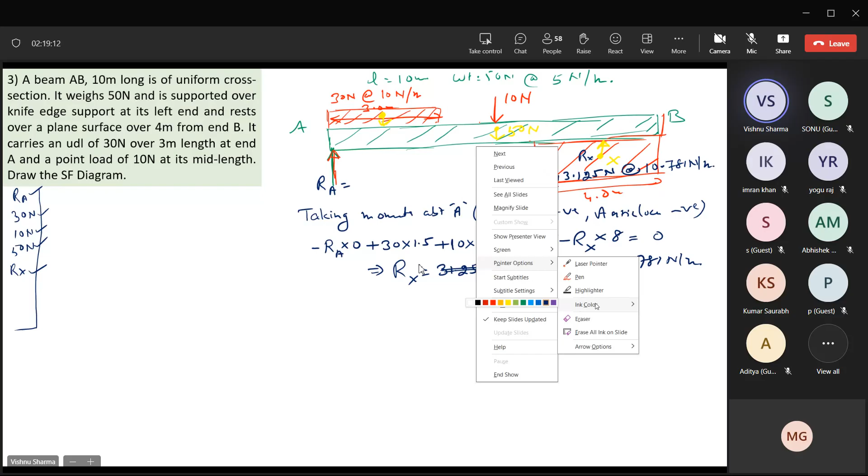Okay guys, now you have to look at the beam diagram carefully. Two tips I have given you for identification of the points. One is the ends, and other are the point forces. So which all points qualify under these two conditions? A, B, or center C? A, B, and center, okay, we'll name them. Don't worry, very good, you're right.

So as per the two conditions we have done, 3 points already qualify for the table: the ends and the center where 10 Newton is acting. Correct? Yes. Now I will move my laser, and wherever you see change in the forces which are uniformly distributed, you tell me to stop.

They will be the points to be considered. I repeat again, I'll move my laser like this. Wherever you find that the uniform forces—I'm not saying UDL, I'm saying uniform force, whether up or down—wherever the uniform force changes, you tell me stop. I'll take that point. I'll be gradually going. Please use the word stop for me to stop wherever you want.

Yes sir, before that also, when I go again, wherever the uniform—okay, first tell me, in this question, how many uniform forces are there? 1, 2, 3, 4, how many? 3, sir, 3. Wherever you find there is a change taking place, tell me stop.

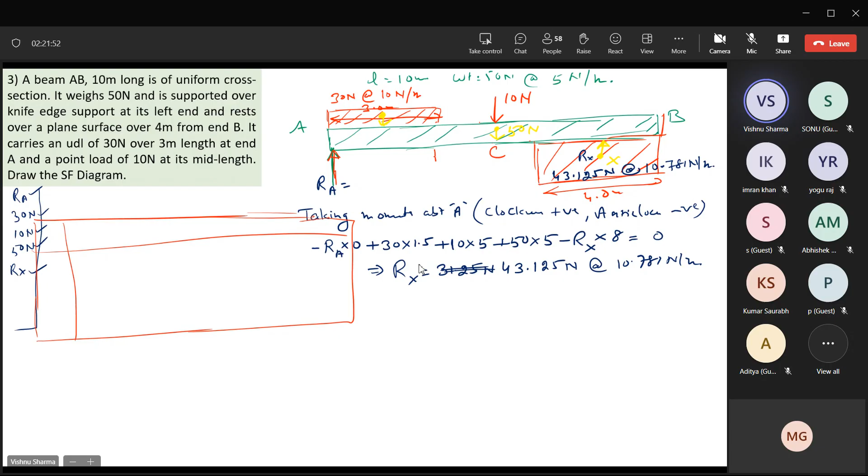Now we'll name the points. A and B are already named. Maybe we can name C, maybe name D, E, whatever your naming is up to you. But make sure once you name them, you stick to that. So that it does not confuse, 1, 2, 3, 4, 5. As per my naming, it is A followed by D, followed by C, followed by E, and followed by B. Once you name them, you cannot fool around.

Look at the diagram and tell me how many cells need to be divided into two. 4, sir. Which all four? A, D, E, B. At D, do you have a point force? What was the criteria for division? Okay, now tell me, how many cells need to be divided into two?

Three. A, C, D. A, C, B. A, C only? A and C only is one answer. You are saying something else, what are you saying? A, C.

Where are the point forces? Which are A and point C? Yes sir, those are the two point forces, A and C. Okay, first tell me RA.

Can you subtract and calculate RA? RA will be equal to total downward force: 50 newtons, 10, 60, 60 plus 30, 90, 90 minus 43.125. How much does it come to? 46.87, sir.

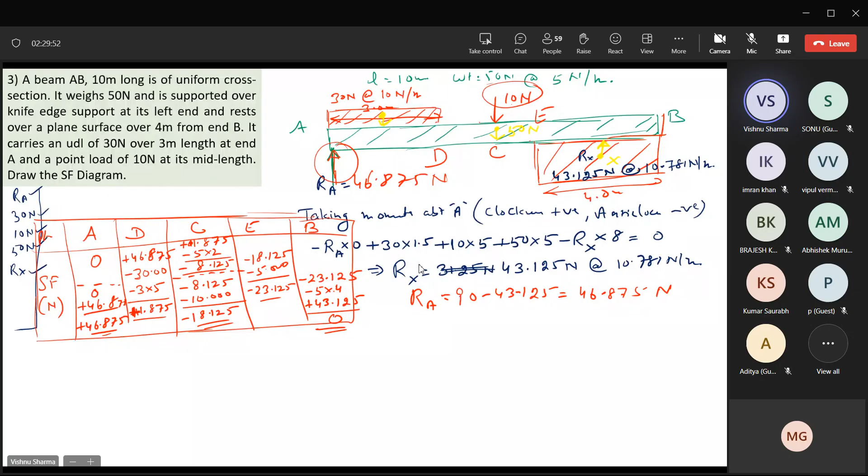If anybody has any question in the class on this beam diagram for shearing force. Sir, in this particular question, at the rate 10.781 - doesn't it make a difference? Is it not required? If that would have been used, if there was some concentrated load here and you have to calculate somewhere in between, na bete?

Okay sir, but if you've gone from E to B, then you're taking the full length, no? So 10.781 into 4 will give you the same thing, no? Because you got 10.781 by dividing it by 4, right? Yes sir. No - so if something in between was required, then you'll have to do that, right? Yes sir, correct. So in this question it is not required.

This is Beta - if you've gone from E to B, the entire reaction has come. Now look at it that way, rather than asking if in this question it's not required. From E to B, is the full reaction coming into picture? Yes, full sir. What is the reaction at the right side? 43.125, correct? Yes, sir. So tell yourself like this, okay? Any more questions, guys?

Now we are good to make the SF diagram. We have, I'll see, plus 46 minus 23. So that means I need to have a little bit down below and more of it up. I can go up and use a blue marker or green marker to draw. That will solve the problem.

Go up a little bit, no issues. Okay, I need to go up to plus 50. So if this is plus 50, then this is 10, 20, 30. Okay, so 10, 20, 30, 40, 50.